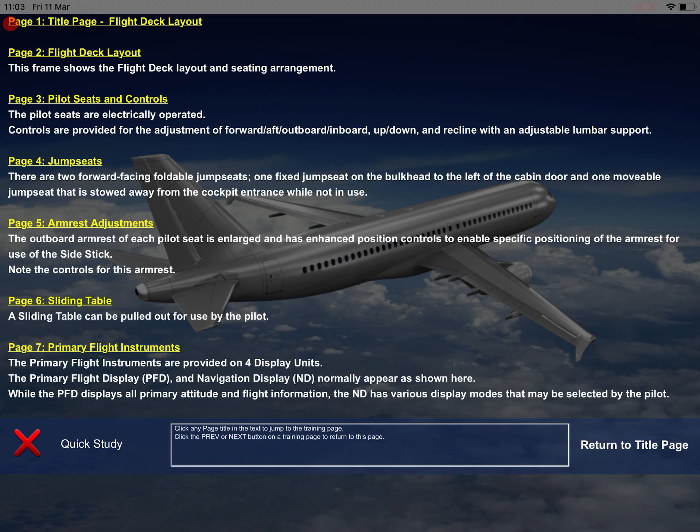This frame shows the flight deck layout and seating arrangement. The pilot seats are electrically operated. Controls are provided for the adjustment of forward, aft, outboard, inboard, up, down, and recline with an adjustable lumbar support.

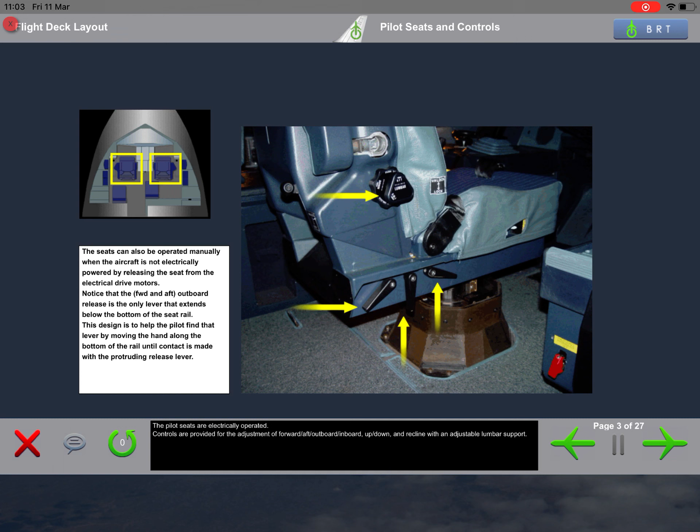There are two forward-facing foldable jump seats. One fixed jump seat on the bulkhead to the left of the cabin door, and one movable jump seat that is stowed away from the cockpit entrance while not in use.

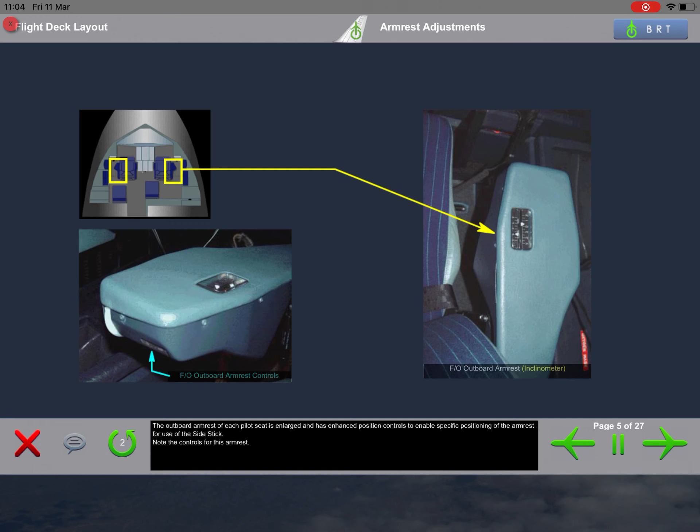The outboard armrest of each pilot seat is enlarged and has enhanced position controls to enable specific positioning of the armrest for use of the side stick. Note the controls for this armrest. A sliding table can be pulled out for use by the pilot.

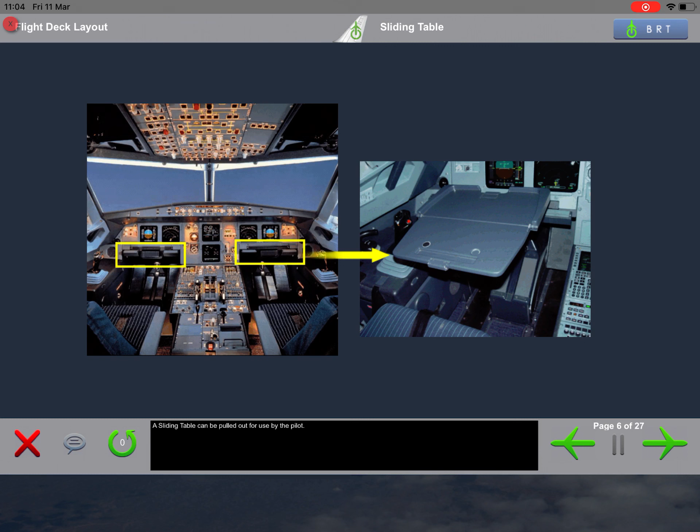The primary flight instruments are provided on 4 display units. The primary flight display, PFD, and navigation display, ND, normally appear as shown here. While the PFD displays all primary attitude and flight information, the ND has various display modes that may be selected by the pilot.

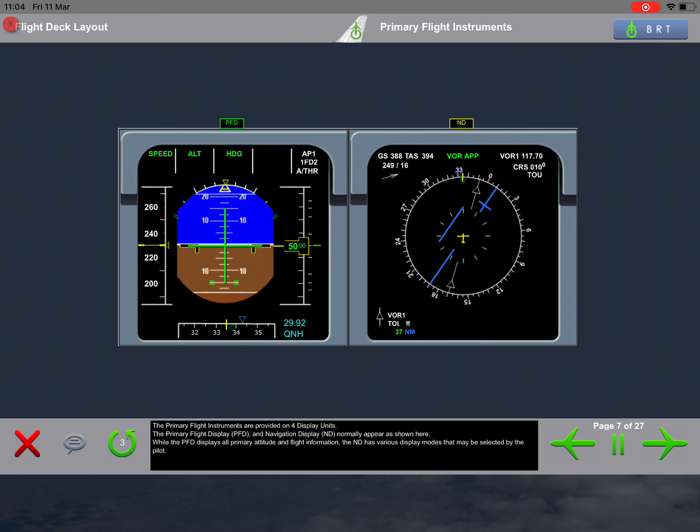The electronic centralized aircraft monitor, ECAM, displays on an upper and lower display unit and is controlled by the ECAM control panel. The upper DU shows the engine warning display, EWD, which provides a display of engine parameters and also provides abnormal and emergency checklists and warnings. The lower DU shows various system displays, SD, as selected on the ECAM control panel.

To the left of the ECAM are the Standby Flight Instruments, or Integrated Standby Instrument System, ISIS. To the right of the ECAM are the controls for the landing gear and brakes.

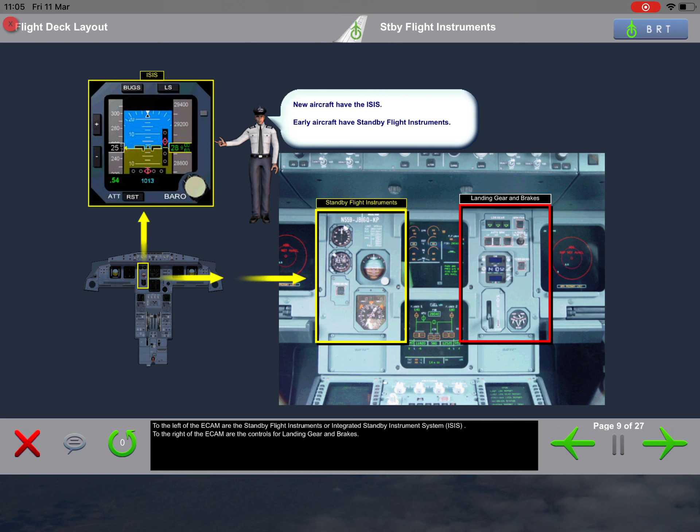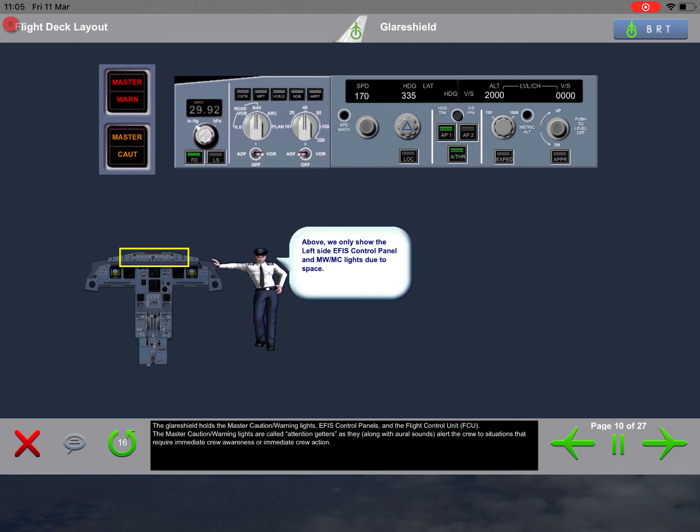The glare shield holds the master caution warning lights, EFIS control panels, and the flight control unit, FCU. The master caution warning lights are called attention getters, as they, along with aural sounds, alert the crew to situations that require immediate crew awareness or immediate crew action.

The EFIS control panels allow the pilot to select various display modes on the ND and to control the altimeter setting that is displayed on the PFD. The Flight Control Unit, FCU, is used to provide selected inputs to the auto-flight system.

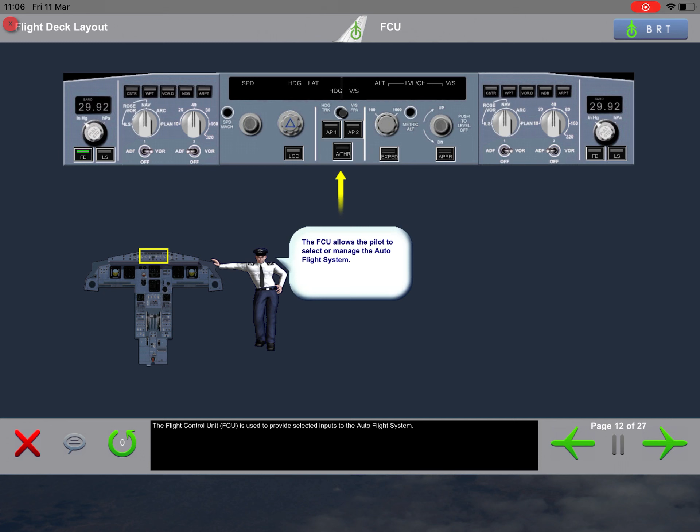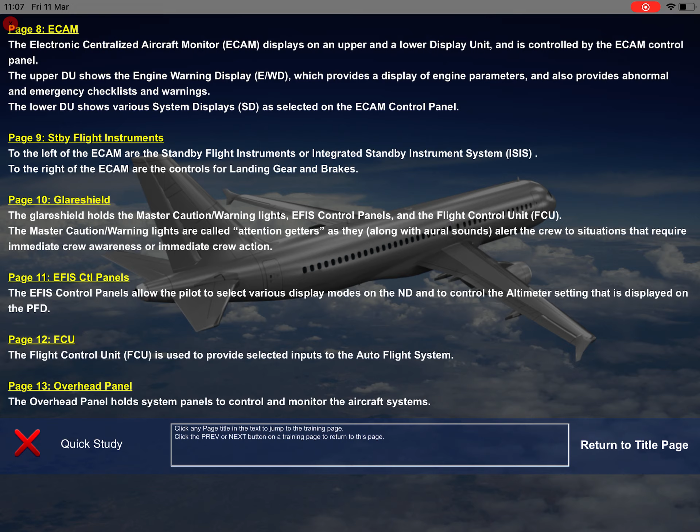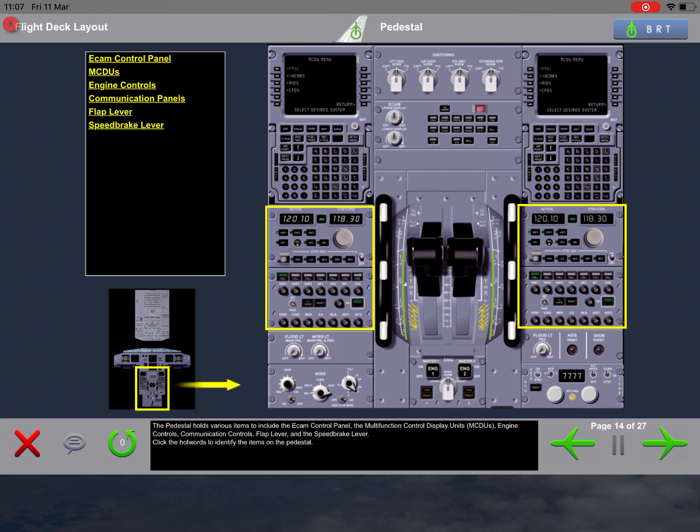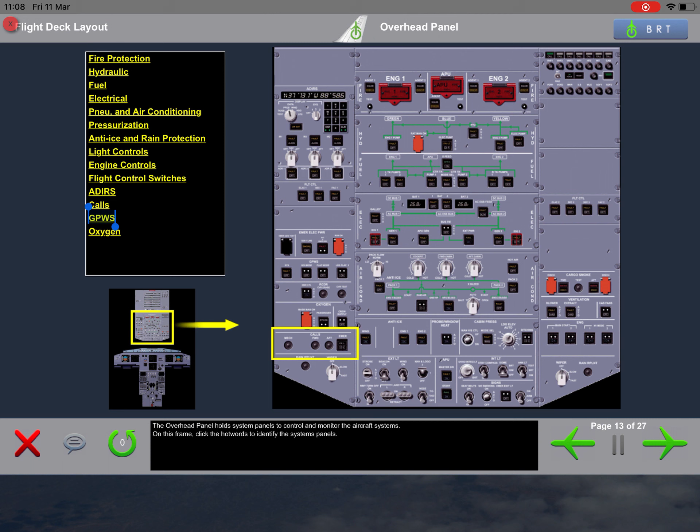The overhead panel holds system panels to control and monitor the aircraft systems. On this frame, click the hot words to identify the system panels. Loudspeakers are installed in the flight deck to provide crew alerts and to hear air traffic control communication.

We'll now describe the operating philosophy of the flight deck switches and lights. The flight deck is designed with a lights-out concept. Therefore, for normal operation, the white lights in the overhead panel push-button switches should be extinguished.

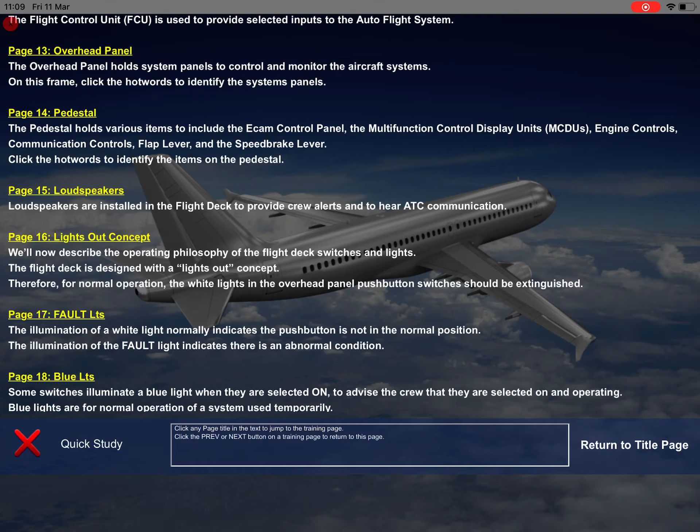The illumination of a white light normally indicates the push button is not in the normal position. The illumination of the fault light indicates there is an abnormal condition. Some switches illuminate a blue light when they are selected on to advise the crew that they are selected on and operating. Blue lights are for normal operation of a system used temporarily.

Additionally, a green light may be used to advise the crew of a normal operation, such as when the auxiliary power unit is available. Green lights indicate a normal condition.

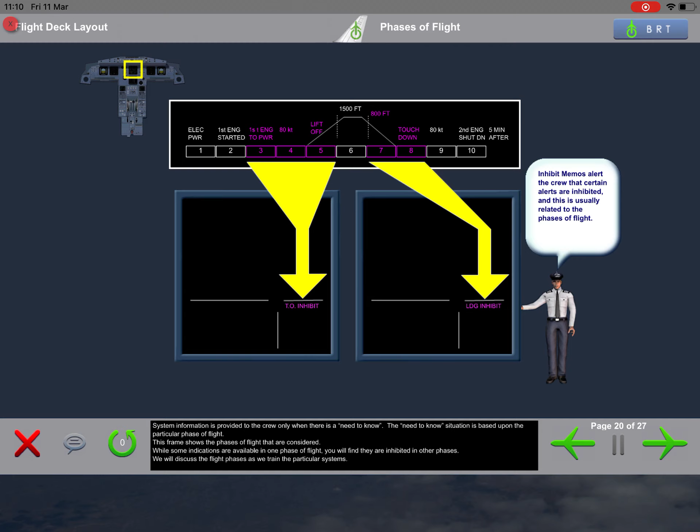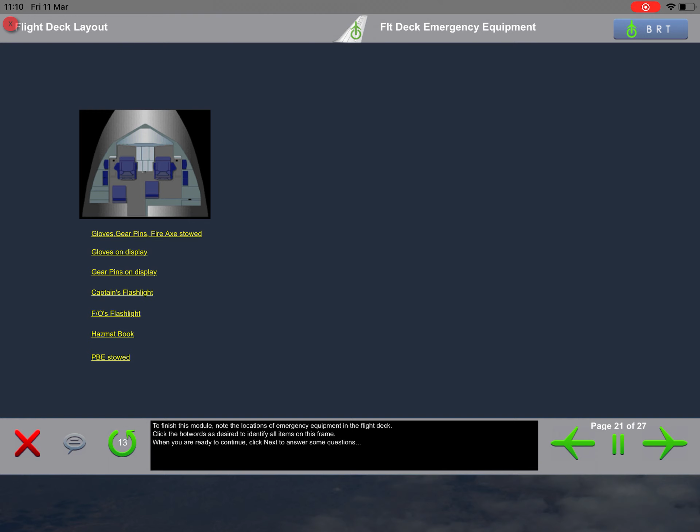To finish this module, note the locations of the emergency equipment in the flight deck. Click the hot words as desired to identify all items on this frame. When you are ready to continue, click Next to answer some questions.